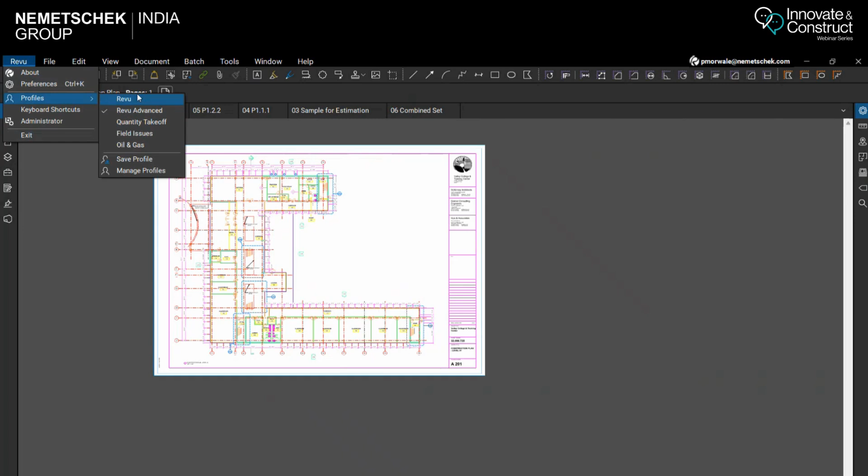But if I change to, say, Revu, you would find some changes happening in the profile. You can suppose change to Revu Advanced, so you will find some changes happening in your user profile. When I was in Field Issues, probably you did not see much of a difference in the user interface, but the tools you are seeing are all talking about issues. When you go to Revu, you can see under the tool chest, it's changed.

All these tool sets under the tool chest changed. So which one is the more appropriate profile? I would suggest that probably you can start with quantity takeoff.

So this is the profile, the user interface, and you can see over here under the tool chest for electrical, mechanical, concrete, interior finishes, fire and safety - all these tool sets are present.

If you want to add your own tool set under this tool chest, just go to manage tool sets and you can add your new tool set. So I will just say webinar tool set, say OK, and it gets saved under your Windows profile. It's a BTX file, a Bluebeam tools extension file. You save it, and then it appears over here.

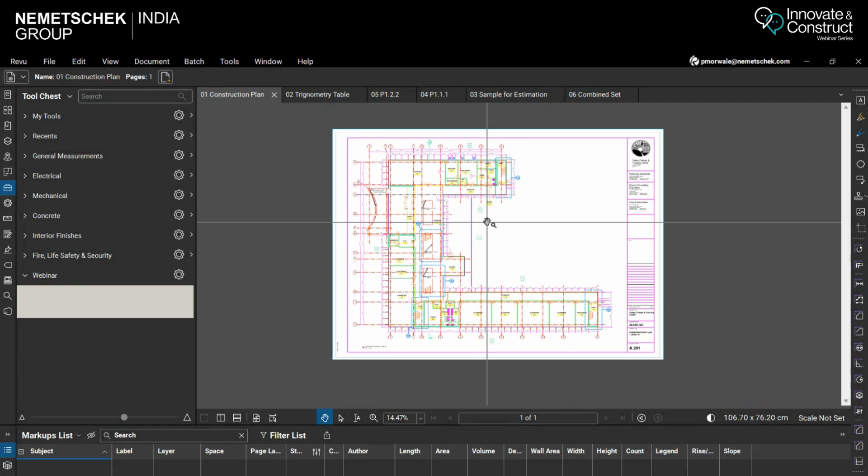Okay, so coming to the next topic: run OCR for the scanned PDF. Let's just assume that this particular drawing that you're currently seeing is a scanned image.

Generally what happens in scanned images, if while scanning you are using a multi-function device, MFD, if it's a very good MFD, there is always an option whether the PDF file should be made as a searchable PDF or if it's just an image.

So if by any chance you have not scanned the image yourself and it is not able to recognize the text - see, right now I can highlight it, but if it is just a scanned image, you will not be able to highlight the text like this or select text like this.

So in such cases, if you happen to get any document, the first thing you should do is run the OCR. OCR is nothing but an optical character recognition, and there is a built-in OCR engine inside Bluebeam itself. Generally, if you don't have the proper application, you would need another OCR engine running first on the PDFs or images. Only then will you be able to identify the characters or the lettering.

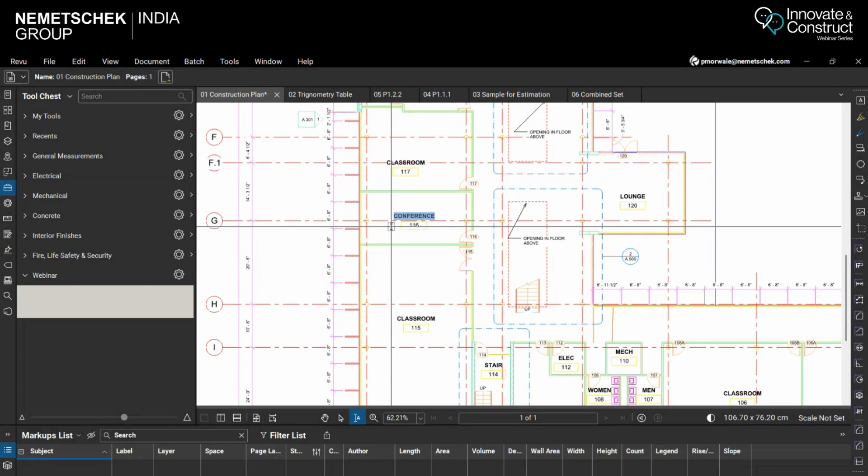But still, there could be some confusion happening around a small L or capital I, or zero and O. So it doesn't necessarily have to be 100% accurate, but it is quite reliable. Only thing, the original document should be quite legible. Now you have the OCR done, and let's now start using the search tool for quantifying the object.

So in this particular example, you can see there are some classrooms, conference rooms, cafeteria and all those things. Imagine this is just one particular sheet, but if you have a number of sheets, maybe floor-wise, and on each floor there are many classrooms, and you would like to know how many classrooms are there in this entire set of drawings.

Based on that, probably every classroom will have one digital board, or maybe every classroom should have at least 40 student benches. So such kind of quantification you will be able to do when you are able to quantify the number of classrooms in the drawing.

Okay, so let's just first start with how to search for something. In the search, you have got textual search, or the image search, the visual search. First we will try to search with the help of text. I want to find out from the current document, or from the current page, or from all the open documents. You can see there are 1, 2, 3, 4, 5, 6 documents open, so I can search a particular text from all of these documents, but in order to save time, I will just say current document.

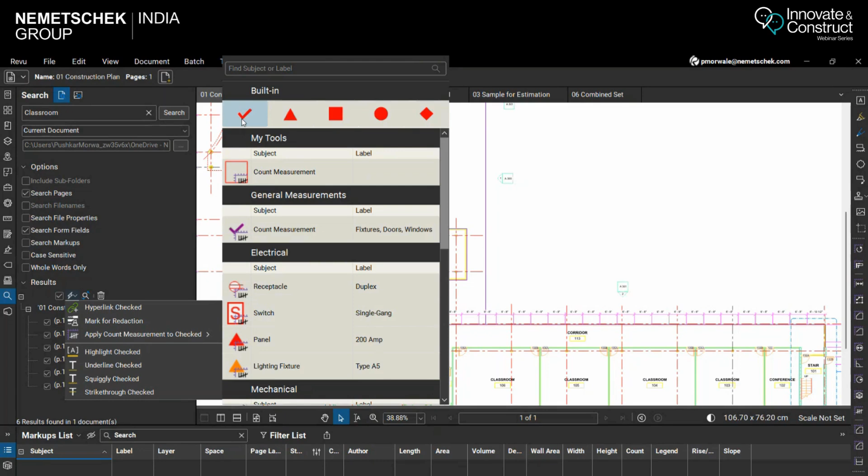So what I can do is select all of them. I can see over here the results seem to be right, and I can select all of them, and then in the check options either I can highlight them, or apply something like a tick mark, or any mark for counting the objects. Let me use this tick mark for it. So you can see wherever there is a classroom, a tick mark has appeared.

So similarly, if I start identifying some other objects, they will also come as count measurement, and whatever number of counts are there, that will be represented. Even if I use the tick mark, it would show the same. So in order to identify what this tick mark was for, it's always a best practice that you give a meaningful subject to this object.

So I would say this was identifying the classrooms. You can see under the subject in the markup list, it has appeared as classroom. Okay, so this way you can search any textual information.

Now, are you able to see that there are sinks, some rectangular shape sinks there? This cannot be identified with the textual search. So for such a thing, we will make use of this visual search, and I'll draw the rectangle to define what I would like to search. So it shows over here, and then I will click onto this search.

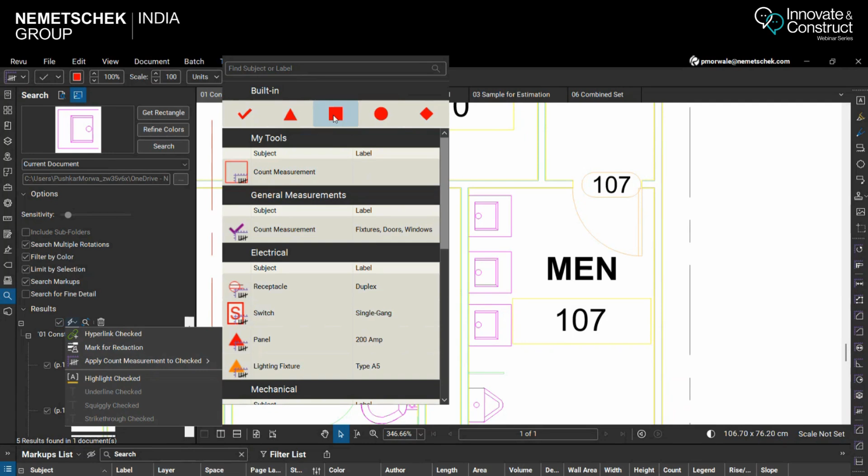So it shows me there are 5 results, and you can just cross check whether they are right. So yes, it is correct. And in this case, again, maybe I can apply the same tick mark, or maybe I can take some different symbol. Okay, so let me take this as the symbol.

And maybe what I can do is, let me just change the scale for it. Maybe I'll make this as 25.

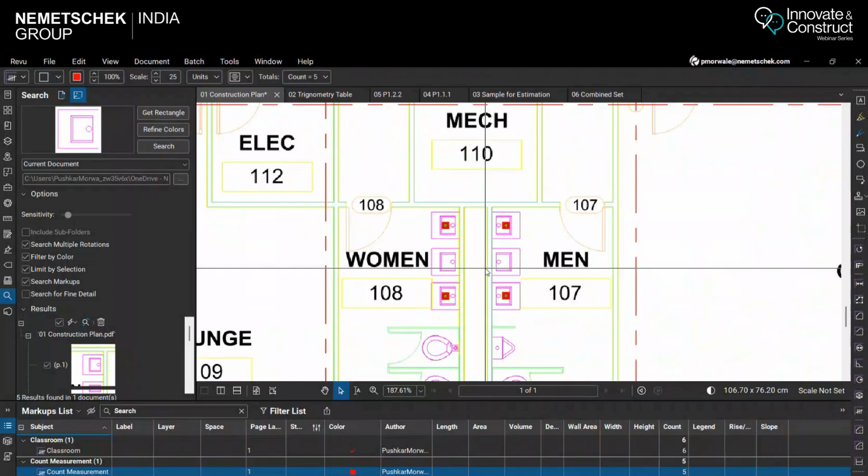Okay, for some reason it has not selected this. Maybe you can reduce the sensitivity or filter by color, and all those things are some parameters. Depending upon the parameters, it is actually selecting. Or you can put this as an additional quantity that will also get quantified.

So currently, let me just put this as sink. Okay, and you can of course change the other property also, so let me change the color for it. Okay, so this way you can go on quantifying the objects also.

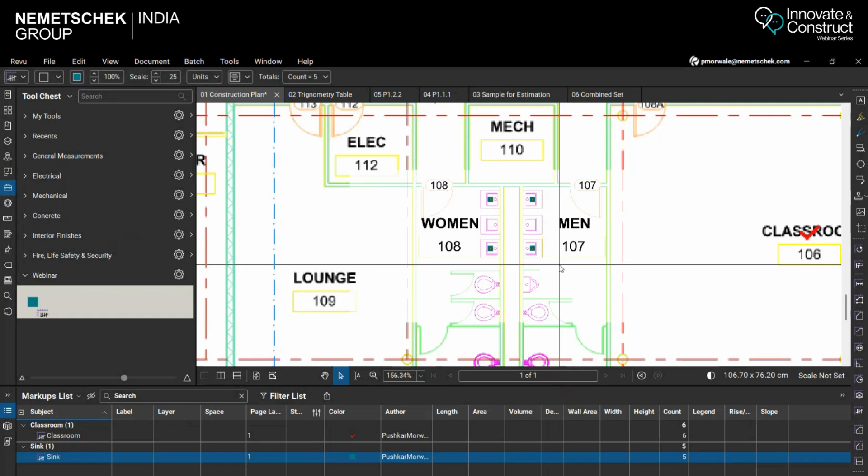Now you remember we had created this webinar tool set, which is empty. What I can do is select this particular symbol and I will say add to tool chest, so it gets added over here. And then maybe if something is missed out or left out, or if I want to add more sinks in probably some other room, all I have to do is select it and mark it wherever it has been missed.

So now it is showing you that 5 and 2 - so altogether 7 sinks are there in this document.

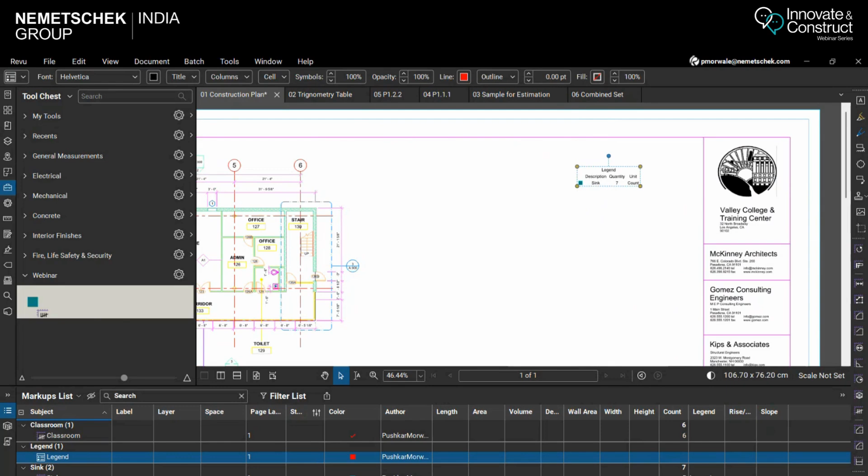Then what I can do is, if I want to create a legend table for these things, I just have to select, right click, and say legend, create new legend, and I can place it in the drawing itself. So you can see it has created a legend for all the sinks - there are total 7 number of sinks, and it has put that in the table.

You can also change the title for this, as well as maybe give some line width, and instead of outline, you can make it like a grid. Okay, so this way you can go on creating the legends also for the measurements or counts that you have done. Okay, so similarly, maybe if you want to get the quantity of the doors, or windows,

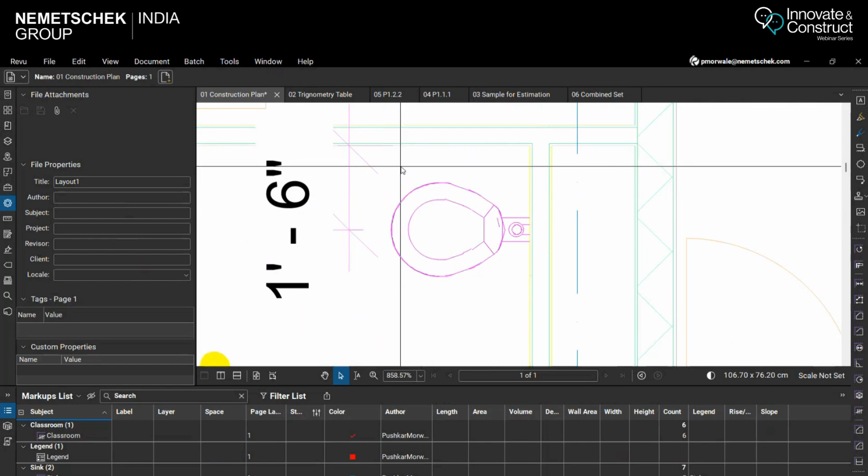or the other plumbing fixtures like WC and all, this way you will be able to get the quantities. So this way you can use the search tool for searching your textual information or the visual information. And also whatever count mark that you have got, you could add it in your tool chest.

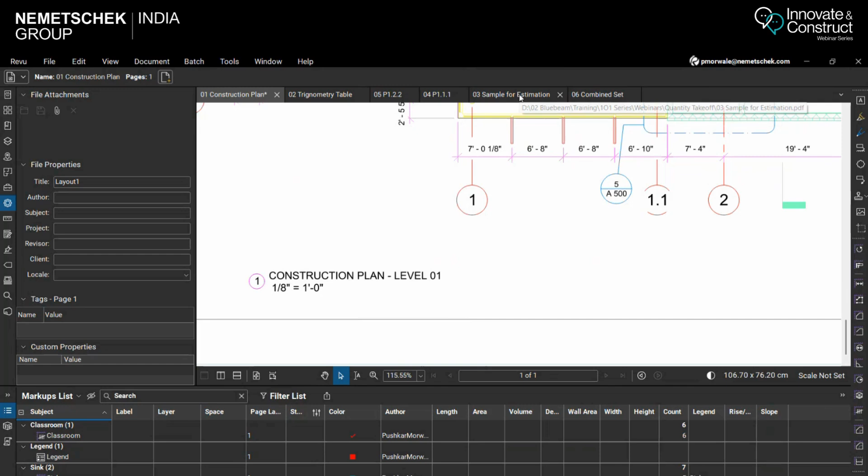So now we will jump to the other topic, that is how can we do the other measurements like length, area, perimeter, or volume kind of thing. So in each and every drawing, you would always see there is some scale mentioned. In some cases, I am just showing you another example where there are multiple scales also, like there is a main scale over here, and then there are sectional views having a different scale. Okay, so we have to set the scale of this particular document first.

Can you see at the bottom, it is mentioned as scale not set. So the first thing that you will have to do in case of the measurements is set the scale for this. So in the preset, you would generally find all the standard preset scales used for engineering, I mean the metric system or the architectural system.

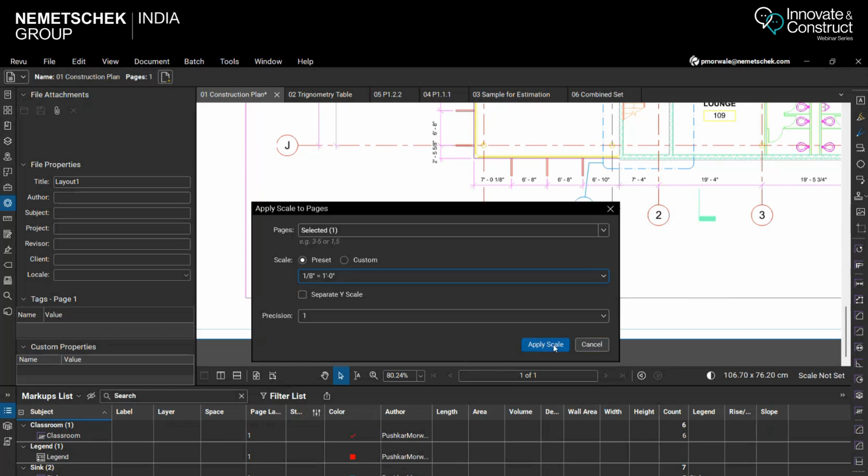So it's in feet and inches or like in the metric system. So in this case, the main scale of the drawing is 1 by 8 inches equals 1 feet, so that I would apply over here. There is also a facility to have a separate Y scale. Okay, so now this has been set, you can see over here it is same as this.

So quickly what we will do is we will just go to the measurements and cross check whether the scale is correct or not. So one good thing about Bluebeam is, if the PDF is being extracted from any vector native application or authoring tool or CAD application, then it gives you the snap also, so you can snap to exact intersection points or the end points.

I will just change this, the length part, into feet and inches. So there seems to be some discrepancy in this case, because this was mentioned as 7 feet and 1 by 8 inches. So the scale which has been mentioned on this drawing is probably not right.

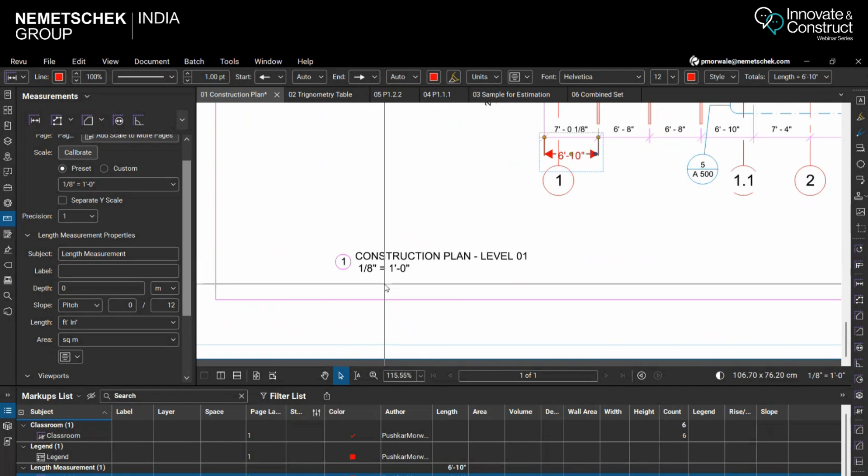So the next thing we can do is, instead of using this standard scale, there is an option to have the calibration done. So what we can do is we will say calibrate, okay, and we will select the same points. And it is telling me that in the drawing, it is so and so inches, which is equal to 7 feet, 1 by 8 inches.

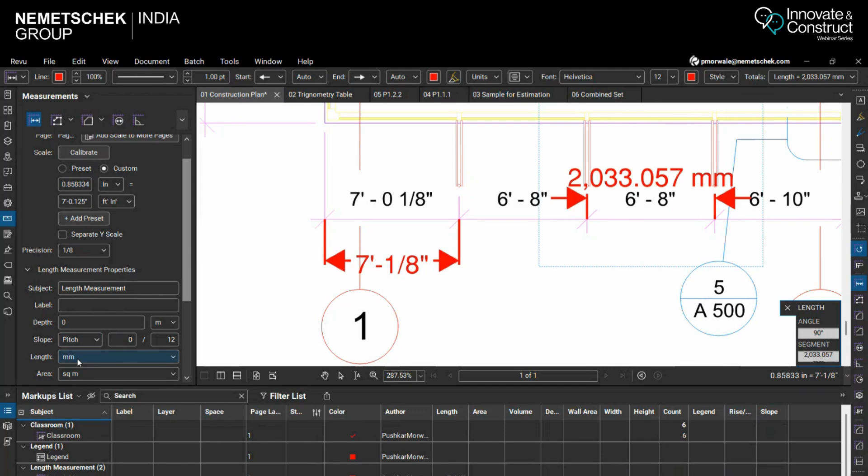And maybe the precision, I can do it like this. Okay, now let us see if this particular scale is correct or not. So let me just try some other dimension. So now you can see it is correct. So this way, I will set this.

And this I will set as default. So instead of getting the millimeters in again and again, I would now get feet and inches. Okay, so this is now calibrated. So once this is calibrated, for me, it is very easy to find out some lengths or area.

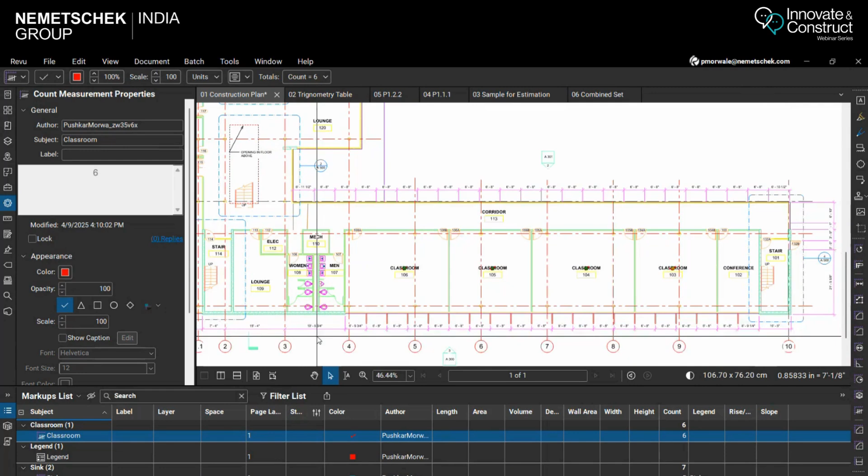So let's just start with maybe the length. So which all measurement tools do I have? I've got the length, I've got the area, I've got the volume. So now in this case, okay, so there seems to be some overhead canopies there.

And since the dimensions are marked from grid to grid, but this canopy is starting from this point onwards till this point over here, it is not matching exactly with the grid. So it is difficult to find such length. So what I can do is, now this drawing is already calibrated.

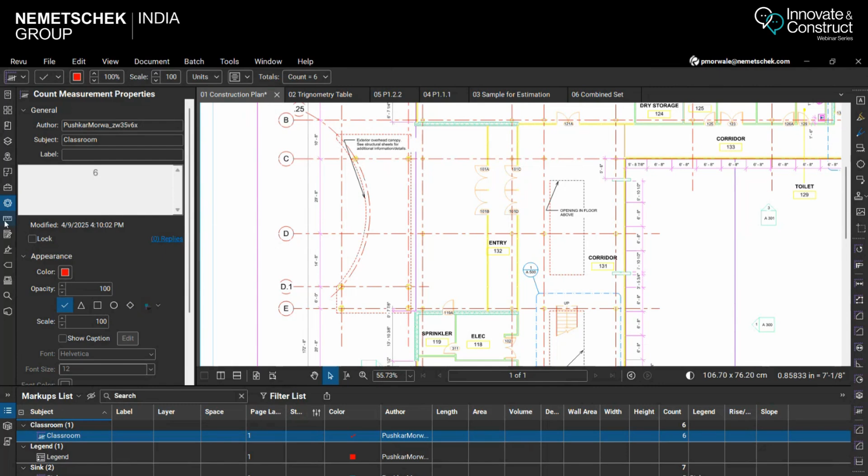And if I want to know what is the length and the width of this canopy, then I can go to measure length and use this endpoint. I can select this endpoint and this endpoint. So it tells me it is 49 feet 4 inches. And then from this endpoint to this endpoint. This way I can get whichever length I want.

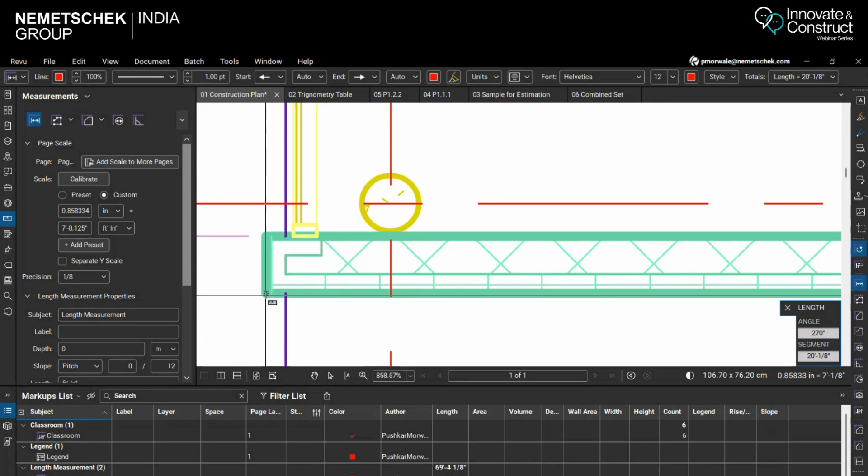Now in this case, it was snapping to the exact endpoints or intersection point. Many times what happens is, if you are extracting it from some application, there is generally a line weight. So you can disable that line weight over here. Like right now, I have enabled the line weight, so you can see the thicker lines. In such cases, getting the exact intersection point could be challenging. So you can always disable the line weights and then you get those sharp intersection points.

So that visual setting you need to do before you start measuring for the length, area, or perimeter, so that you can snap to the exact points.

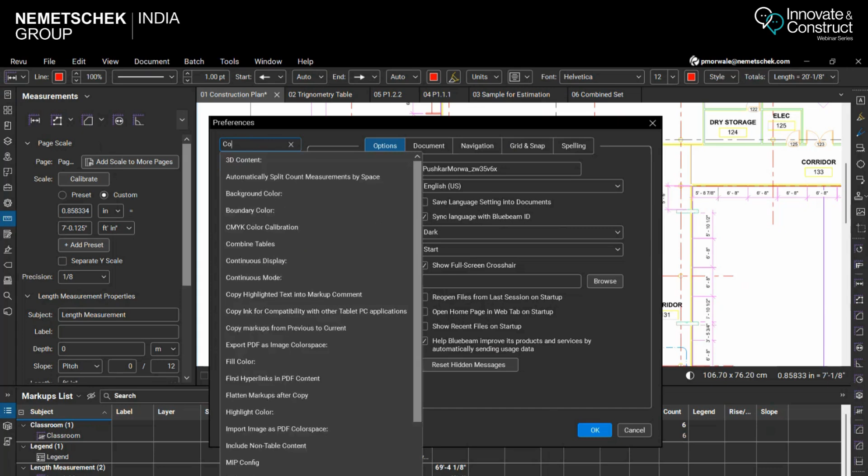Another thing that you would require is, in the preferences, you can make the mouse crosshair show full crosshair. So you can see over here, show full screen crosshair is there. That's why I'm able to see a crosshair like you find it in some CAD applications. Otherwise, it's a very small mouse crosshair.

I can just quickly show you how it looks if you haven't enabled it. So if I remove this, then it is very difficult for you to pinpoint. So for the CAD users, this is very helpful, that you have the full crosshair and the line weights are disabled. So this was about the length.

Now let us try to find out, and every measurement that you do gets recorded inside this markup list. Now let's try to find out the area. Okay, so let's again take the area of this particular canopy itself.

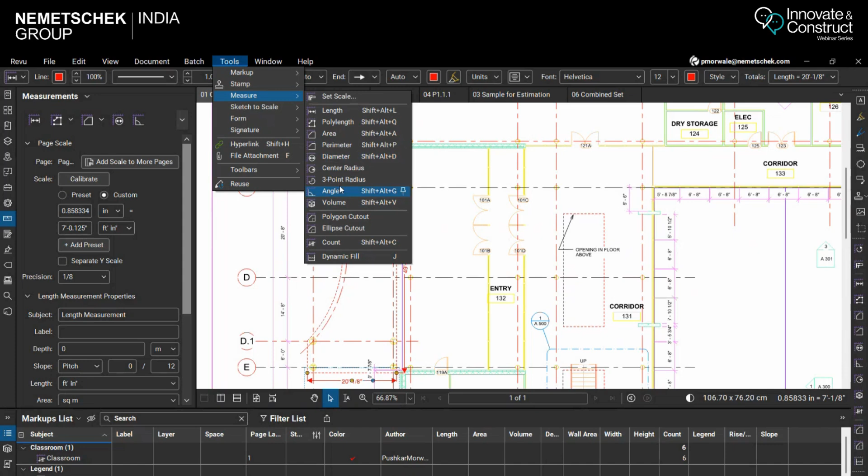Okay, so what you can do is you can again go to measure and go to area, and then you can just go on clicking onto those endpoints. Okay, so this canopy is actually a curved object, but with the help of clicking for the point, it gives you the rectilinear kind of shape.

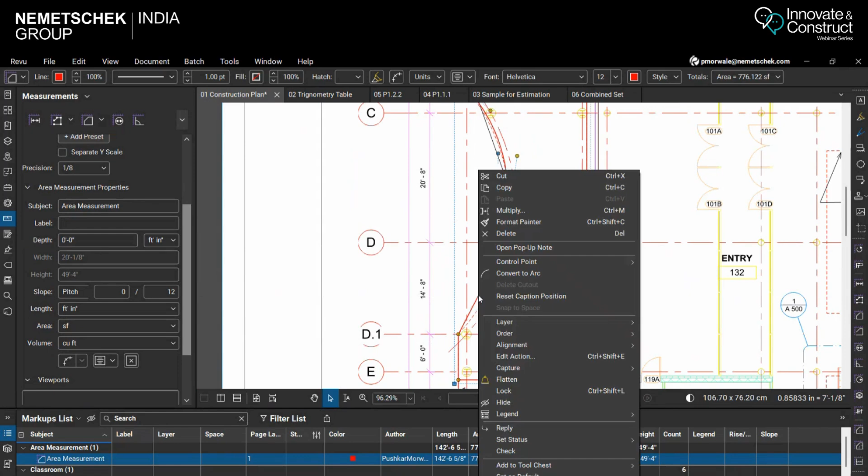So just right click on this and you can convert it to an arc. Okay, and then you would get these tangent handles to match the curvature that you have. So are you able to see it's like going on changing the area as I change the curvature? This way you will be able to find the area even for a non-linear kind of object.

So your skill lies in just making this curve very accurate. And this is the square feet area of this particular object. And you can see over here, it gets recorded as an area into this. So for this, instead of the subject area measurement, I can mention it as canopy. So then it gets identified.

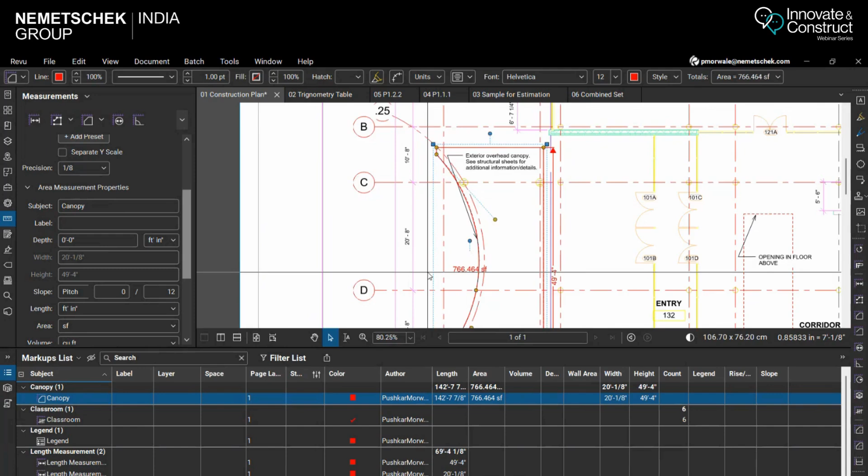Okay, so now if I want to have the length measurements or the area into a legend table, I can get it by selecting those objects, right clicking, and going to legend. I can create a new legend also for it. So it would tell me what are the length measurements accumulated together, and what is the area for various objects. Again, I can make it into a table.

I can give it some name, and I can make it into a table.

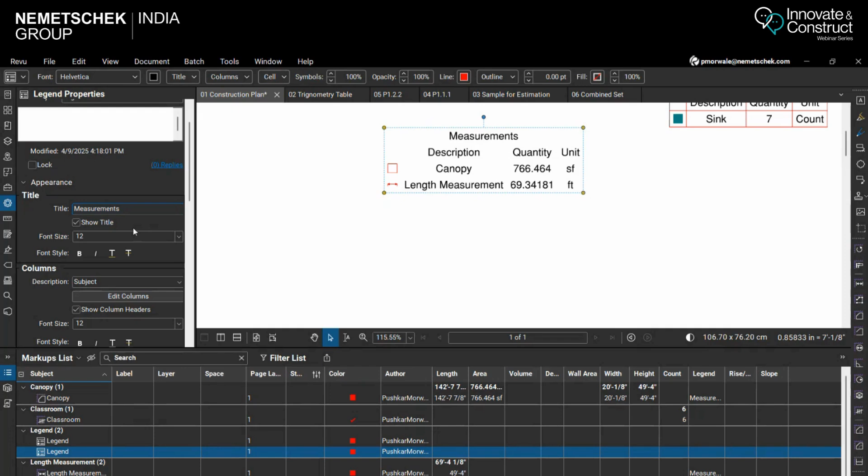Okay, now I want to show you something interesting. So that was about the lengths and the area. Now let's try to do the polylength.

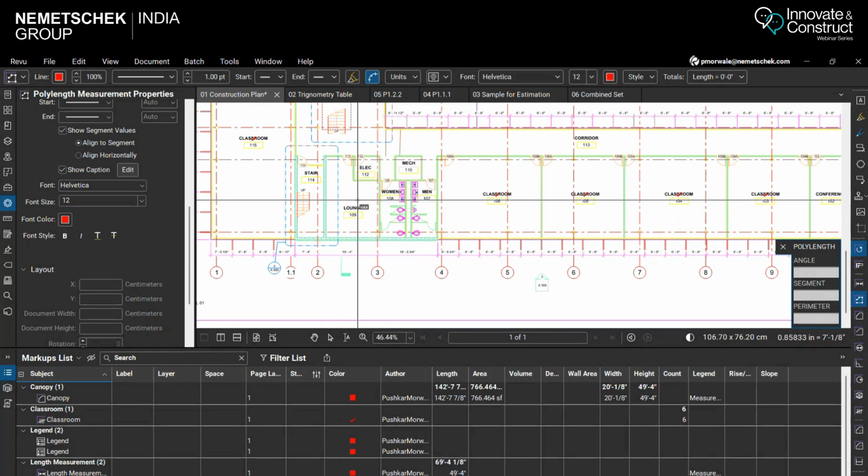This polylength is useful when, say, you're from the MEP department and want to measure the cable length or conduits running from this electrical room to the conference room. In such cases, you would take a source point and go along this path to the conference room, wherever you'd like to have the electrical points or sockets.

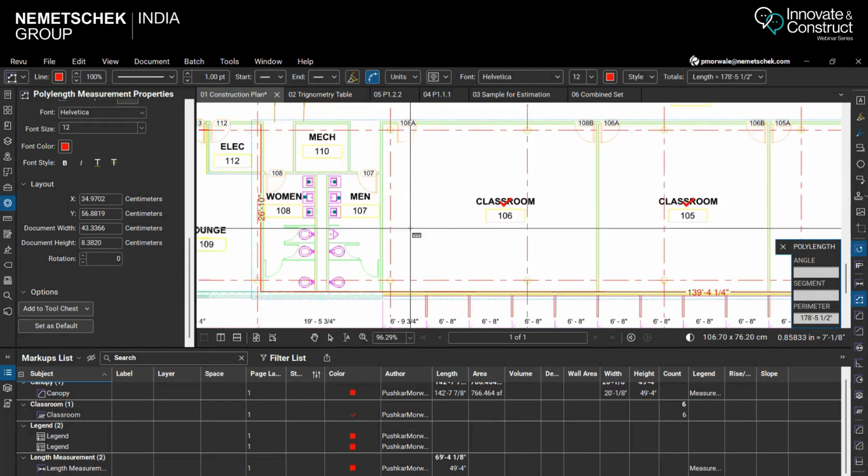It tells me this 178 feet is the accumulated total of various segments: 26 feet 10 inches here, 139 feet 4 and a quarter inches here, plus 12 feet 3 and a quarter inches. All together it accumulates to 178.

But there could be a rise and drop happening at this point, as well as a drop here again. Let's assume at both places it's roughly about 10 feet rise and drop—10 feet in this room, and 10 feet in this room also. So roughly about 20 feet of rise and drop total.

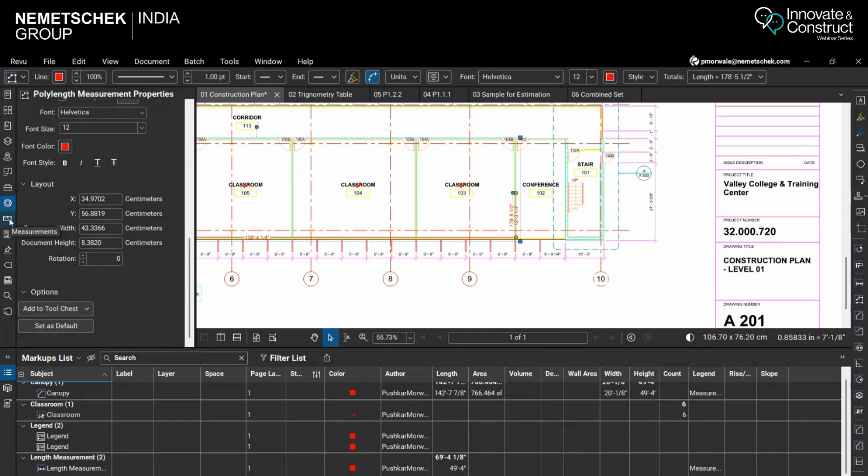So what I can do here is, can you see when you select this polylength measurement, there is a rise and drop? I can accumulate it together as 20 feet. So instead of 178 feet, it now becomes 198 feet, telling you the total rise and drop is 20 feet. This is one good thing.

Now let's assume sometimes the length will be having a slope. The slope can be applied in case of length measurement and area measurement.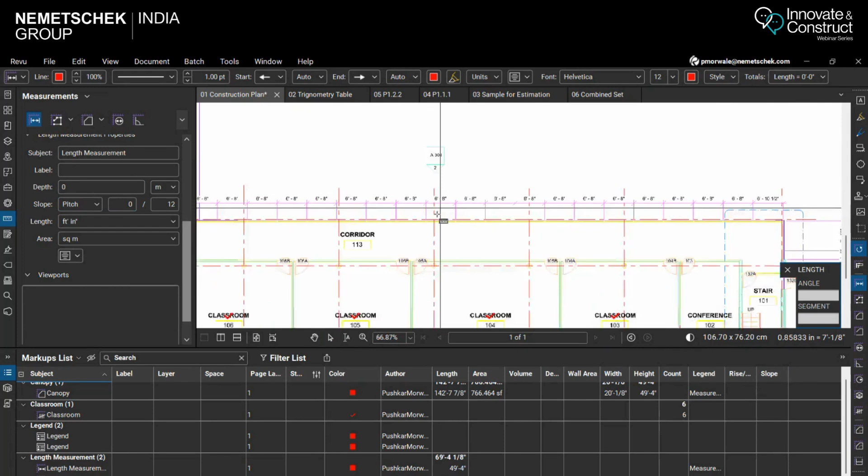For the length measurement, suppose you take a measurement from this point to this point, but there is a slope in this—say, for example, 30 degrees. If you make this as 0, the horizontal length is 32 feet 11 inches. But when you put a sloping degree to this, it increases and also mentions what the slope is.

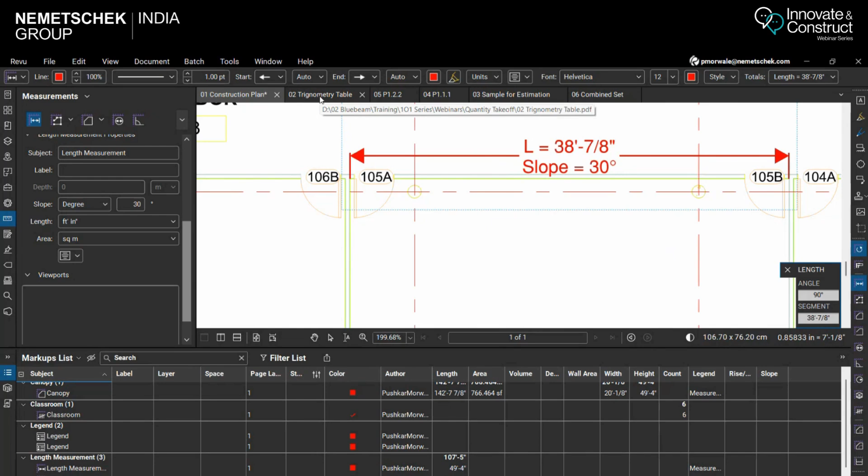Now, whether we have got this correct or not—this refers to the basics of our mathematics or engineering, trigonometry. Depending on what kind of slope there is, you get sine, cos, and tan values. So if it's like 500 length and the slope is 30 degrees, it should show 577.

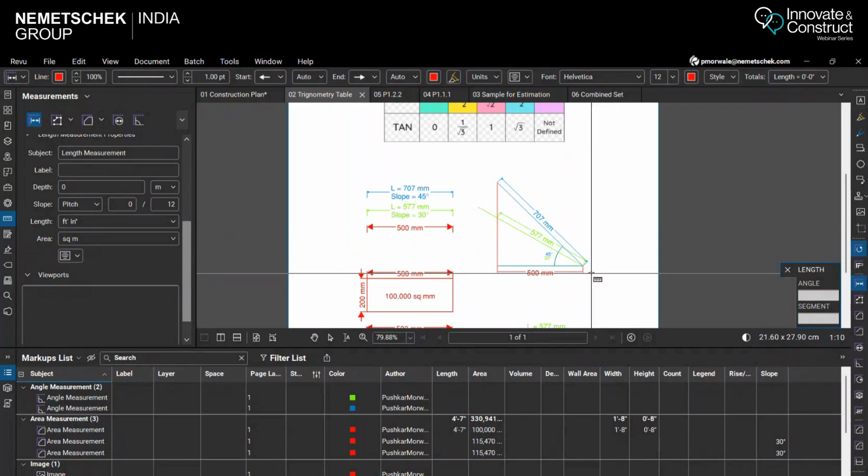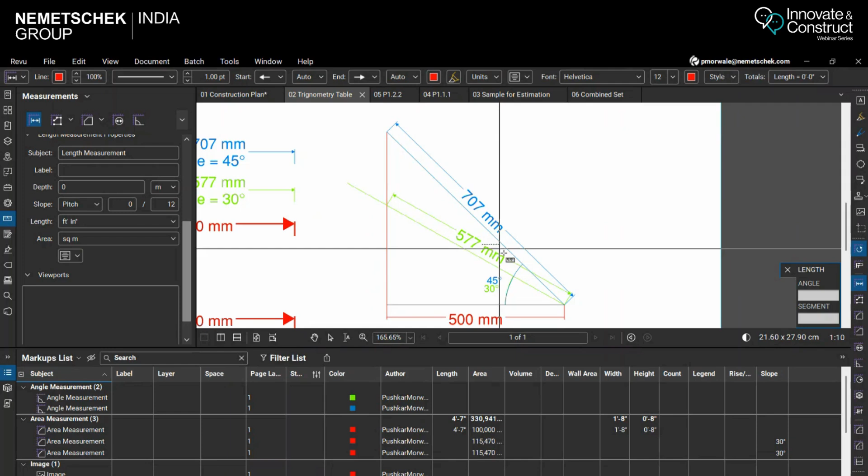There's this particular diagram—if you remember your basics, the distance is 500 and this angle is 30. Then based on cos 30, you should get this as 577. If the slope is 45 degrees, this would become 707.

So in order to check this, I've put this particular formula here so you can cross-check. These dimensions I got through the measurements. The degree matches here, and the lengths are also matching.

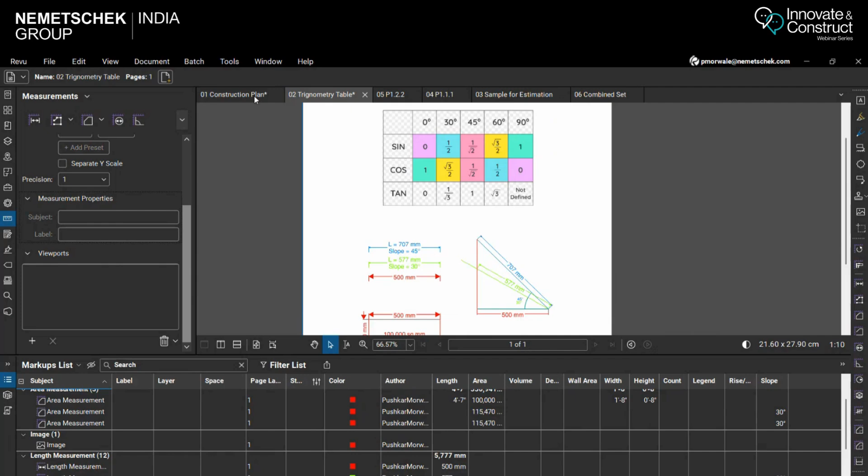So whenever you come across any slope like this, you can use this degree slope without any hesitation, and the results will be accurate.

The same thing also happens for area. If there is no slope, this is going to be your area—the example here is 500 mm by 200 mm. If there is a slope, maybe in this direction, you can consider the length as 577 instead of 500, and then it gives the correct area.

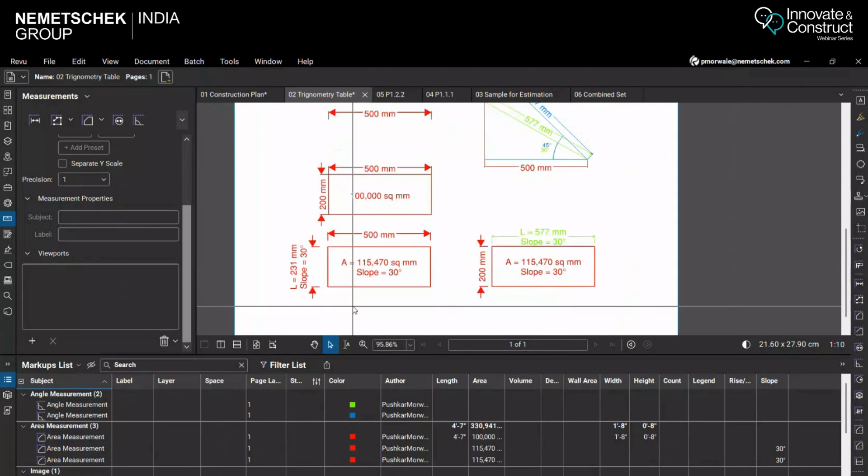And suppose the slope is in this direction also, 30 degrees—instead of 200, now it's 231, and the area can be calculated like this. This exercise I've done just to ensure the results in Bluebeam I'm getting are based on our basic mathematics, and they are correct.

This was very interesting for me also—I could revise my basic mathematics and trigonometry, which I learned during my school time, and it helps.

I would like to show you about the multiple scales. In this particular case, there could be multiple scales in the same drawing—a base scale here, and multiple scales for the sectional details. So how do we set the scale for such a thing?

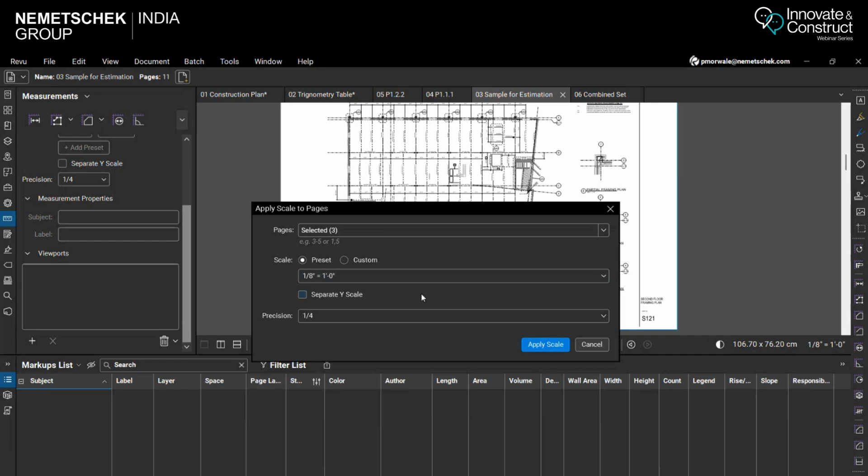First, I would put the preset scale as per the scale mentioned, or I could also do calibration for the drawing. I've set this 1 by 8 inches equals to 1 feet—let's just cross-check whether this is correct or not.

So this is right, that means this scale is perfect for this particular plot. Now let's take the measurement over here. This is 5 feet 4 inches, which is also correct. And almost the same distance you can see over here, slightly less, but not very much less.

But now it is showing totally different. Instead of 1 feet half inches, it is showing me 3 feet 1.5 inches. That is because the scale for this particular sectional view is different.

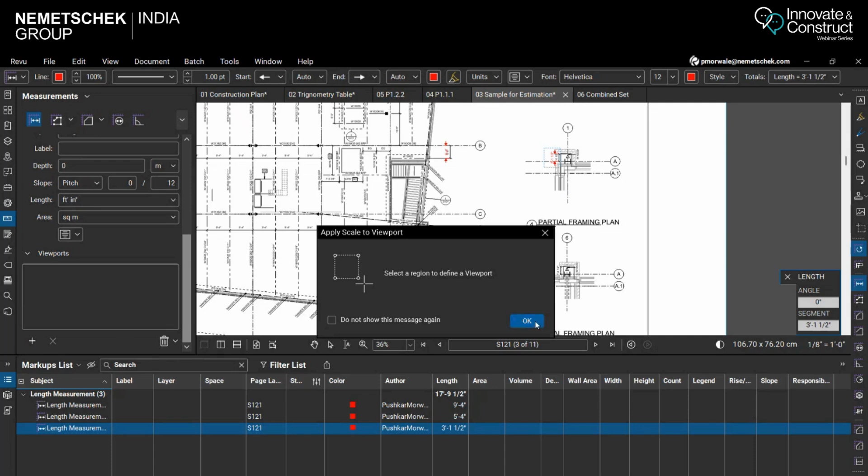So how to create multiple scales in the same drawing? There is something called viewports. You just add the viewport and select the area wherein there is a different scale. I selected all these three because the scale for all of them is 3 by 8 inches equals to 1 foot. If they would have been different, I would have added different viewports and applied different scales.

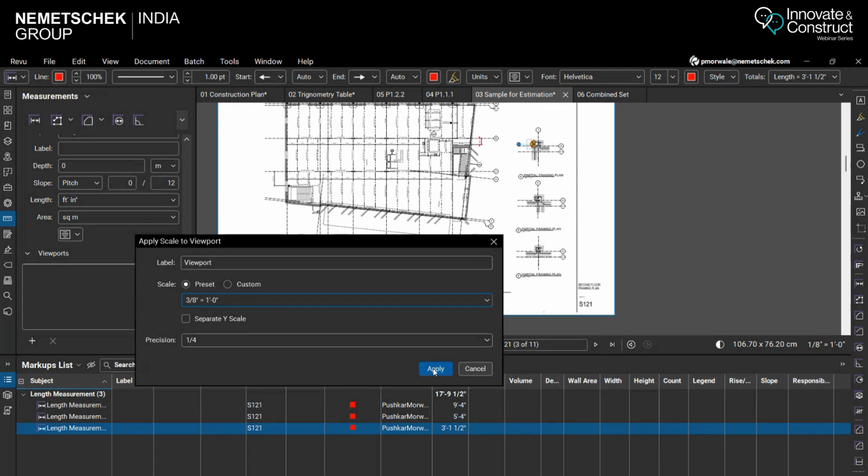Okay, so now this is the viewport, and as soon as I put it into a viewport with the intended scale, you can see now it is representing correctly. So this way you can go on adding multiple viewports.

So for this viewport, I can also mention some meaningful name so that I would remember. This is for 3 by 8 inches. Similarly, if I want, I can add one more viewport wherein it could be half inch equals to 1 foot.

So, say for example, like this. And for this, I would mention 1 by 2 inches. Okay, so suppose if I get this.

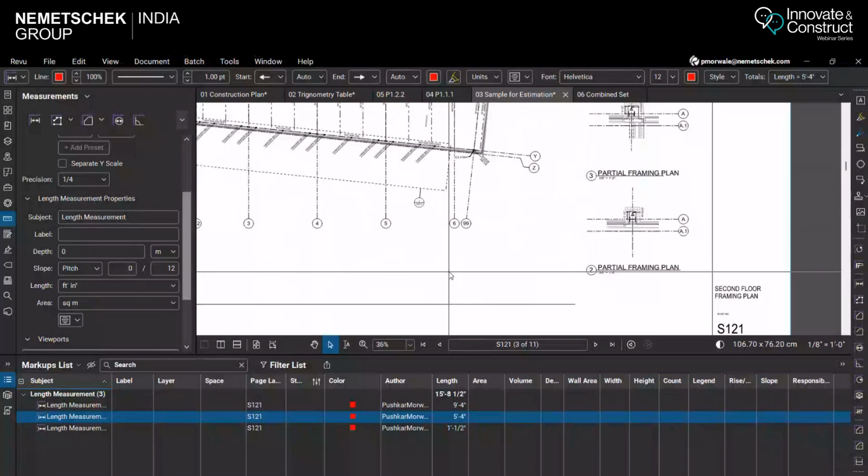Can you see, the same measurement I have copy pasted, but now it is showing me something different - 1 feet 4 inches, because over here the viewport is different, the scale is different. So this way you can go on creating multiple viewports also.

Now let us go to another interesting topic, that is about having the dynamic link with Excel. So there is this particular drawing, and you can see that there are some WCs or sinks. In the sinks also there is a round sink, and a square type of sink is also there, and they all are

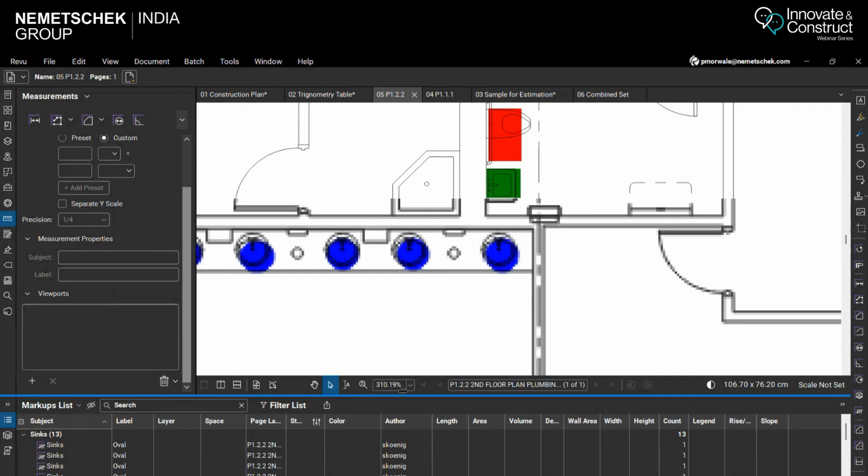recorded over here. So what I can do is I can quickly select all of them, right click, and add a legend. So it tells me that there are this particular sink type is only one count, these are 12 counts, and the toilets are 18 counts.

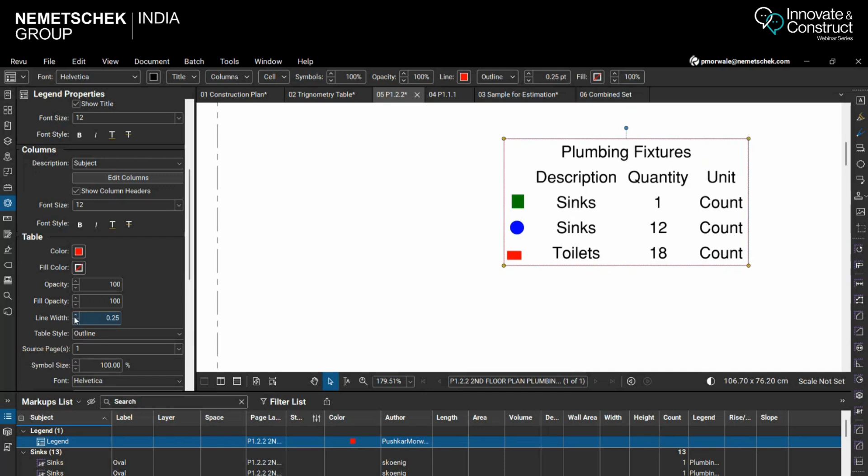For this, I will mention the subject as plumbing fixtures. And again, let me make this as a proper table, and then let me save this.

And then there is another document, wherein again there are these kind of sinks and toilets. So again I will select them, and I will create a legend table for it. And for this also maybe I'm putting the same plumbing fixtures.

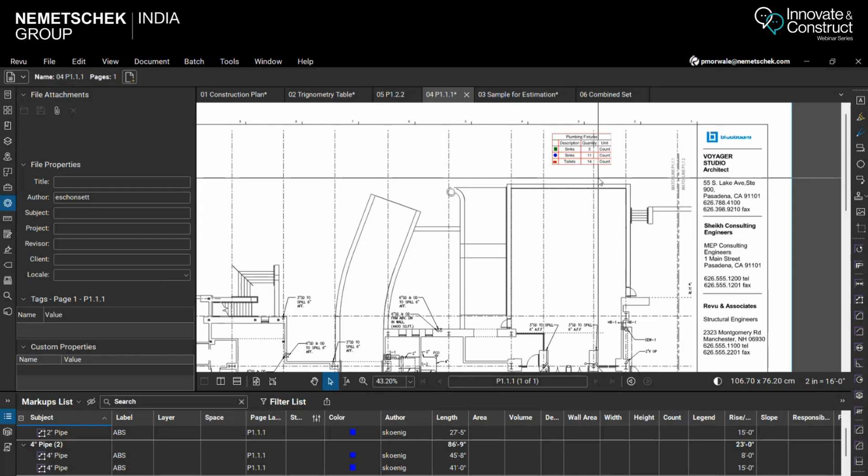Okay, but in this particular document, you can see there are some pipes also, 4-inch, and I can see there is a 2-inch pipe line also. So for this, maybe let me create another legend table and put it over here. Okay, and these are pipes.

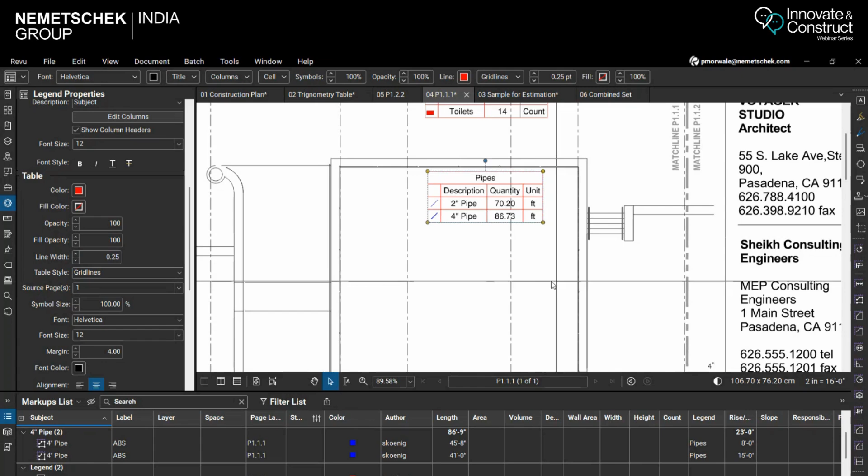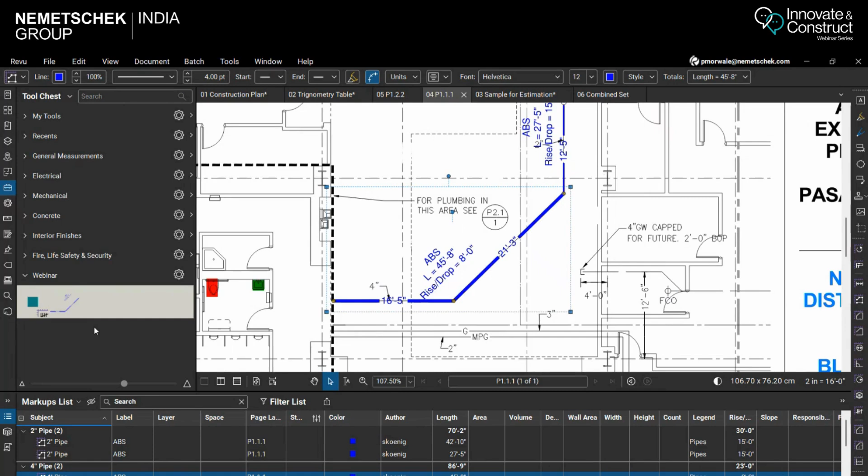So this way you can put quantities in the drawing itself. And suppose if you want to utilize this particular 4-inch line or 2-inch line, all you have to do is select the 4-inch line and then add to tool chest. So you can see over here it has become a 4-inch line. Now I can reuse this, but currently it is in the drawing mode.

So drawing mode means it is exactly copying the same thing over here. Instead of this, I can just double click onto that particular tool, and then I can turn it into a properties mode, and then I can start marking the pipe. So you can see over here right now it has become 118.9 feet.

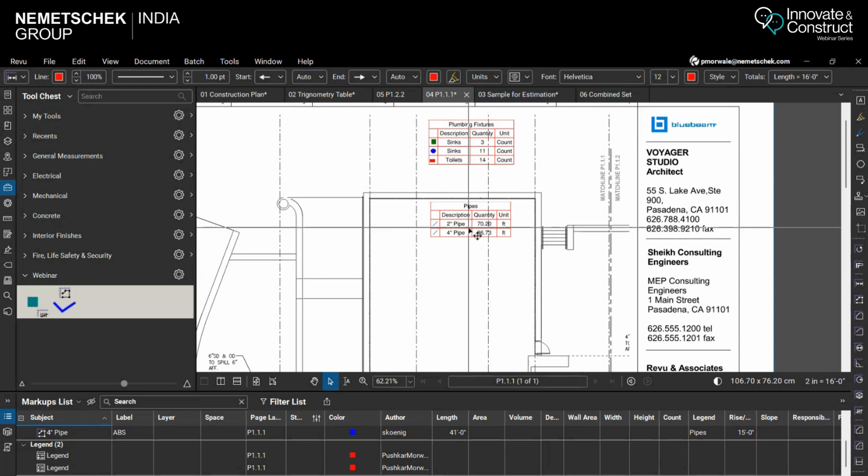If I delete this, you can see in the table also it is changing, right? So this happens, I mean, it is linked, always linked to the legend table. If you go on adding more measurements, it will go on updating in the legend table.

Now let us see how this will be there, I mean, automatically it can update even in the Excel also.

So I'm just opening this quantity link expanded Excel. Let's assume that you have a predefined template. You want to know the cost for the measurement of 2-inch pipes. There is a unit mentioned here, the unit cost is mentioned, and the total cost is over here.

So what you have to do is, in the quantity, you want to link to this particular PDF file. Just right click and you will see this quantity link option appearing when you right click onto any of these cells, and you have to click onto create. Then you will have to get the exact same file.

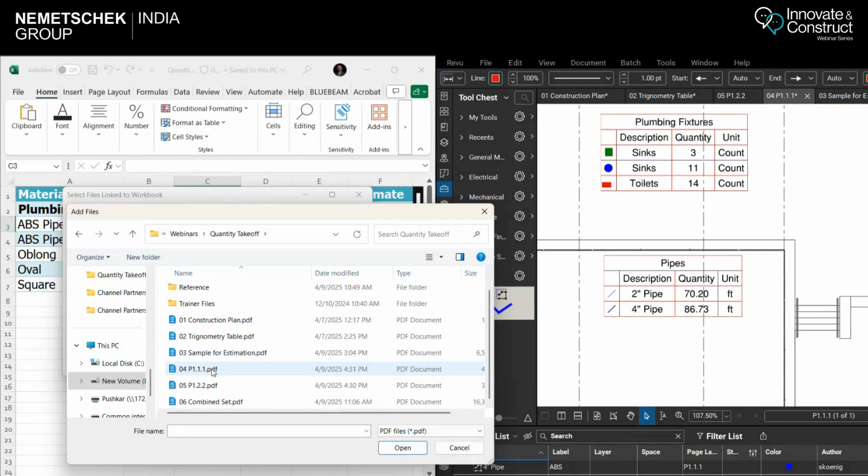So I will just go to the same file. There are these two files with which I want to link it. Then what I want, the first quantity is the 2-inch pipe, so measurement of length of the subject 2-inch pipe. Okay, and say okay.

So you can see it is reflecting exactly the same 70 feet 2 inches. And for the 4-inch, again the same thing. You just have to right click quantity link. The source files are already selected. All I have to do is just get the length of subject 4-inch pipe and say okay. So you see automatically the table gets updated, it is same, 86.73.

And remember, let's just add some measurement over here. The moment it gets changed or added over here, it gets changed in the BOM table also in the drawing, as well as it gets updated automatically over here.

The same way, now you want to find out the toilets. So for that, you have to create a quantity link of the count of subject toilets.

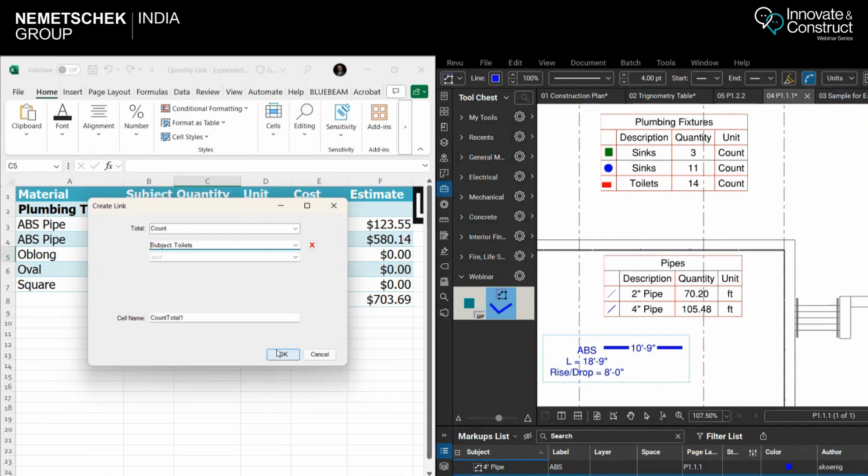Now in the sinks, you can see the subject is only sink, but the material is oval or square. So how to get that? Quantity link, create, count of subject sinks, and the label is oval first. I'll select oval over here, say okay, and then square over here. Create, count of subject sinks, and within sinks the label is square. Okay, so there is 4 count.

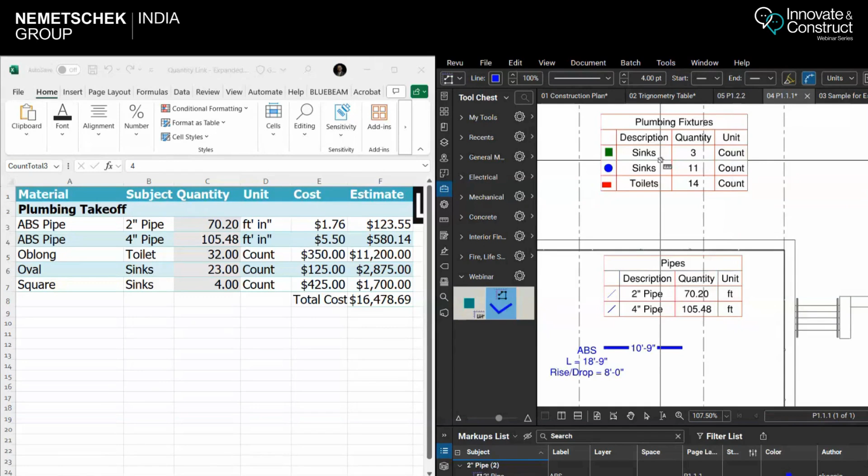You can see over here in this particular document there are 3 sinks, and in this there should be 1 sink, that means 4 square sinks are there. Over here oval sinks are 12 numbers, and over here sinks are 11, so altogether 23. Since we created a link with both these files, it is accumulating everything and giving you this dynamic link.

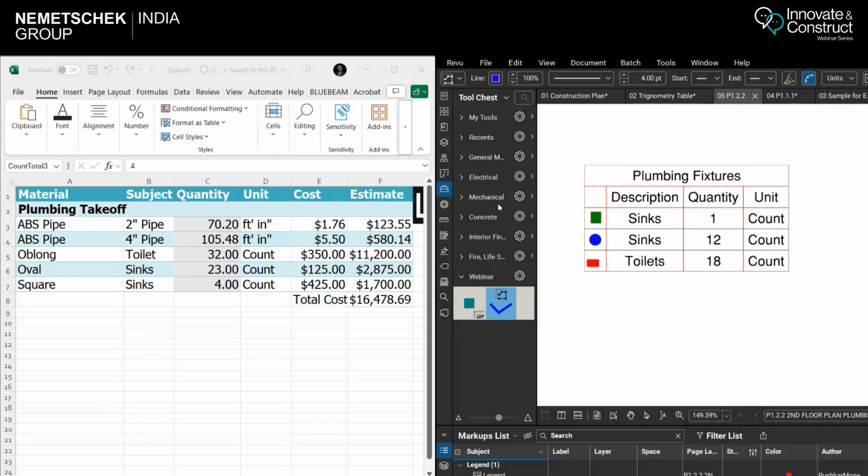This way you can get your Excel template or Excel BOM table also updated. So once all this quantification is done, you get everything in your markup list. Whatever markups you have done, measurements you have done, it is very easy for you to simply extract it in the form of an Excel.

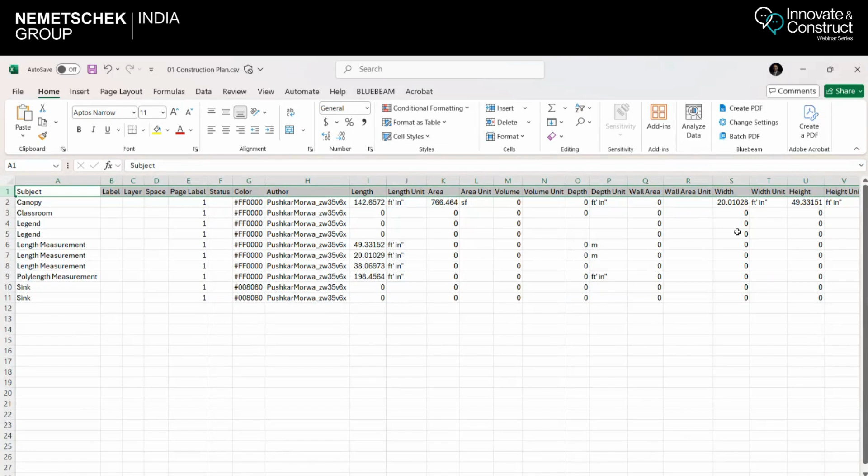Wherever you want to save this, export it, just select all these appropriate options, and then it would create something like this. Which also can be used further, since it is in Excel format, you can put filters, or if you don't want any columns you can delete or hide them from here. You can do calculations also over here. So either you can use this kind of table or you can extract the Excel from here.

How to add or remove the columns? In the markup list, you can see wherever these tick marks are there, those are the columns that you are seeing over here. If you don't want something, you can simply tick this off and then it gets removed from this, and then you can extract your summary.

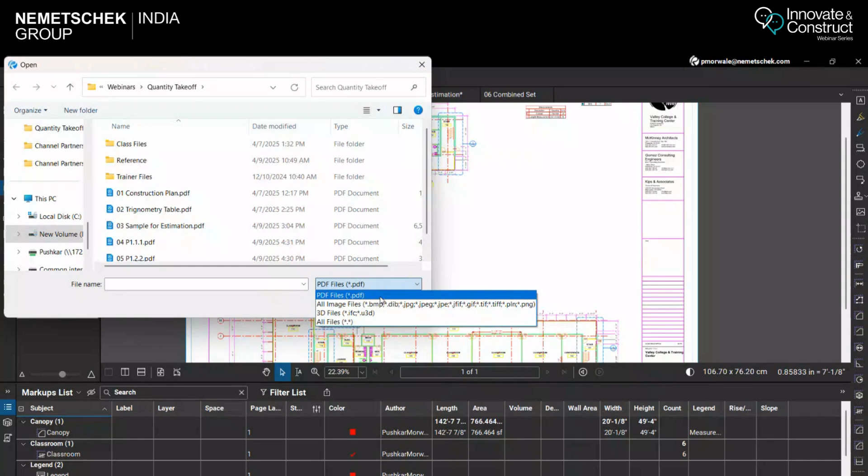Yeah, I think we have some questions. So I'm picking up the questions from the Q&A box first. Bharat Vasu has put up a question: can we use PDF drawings in Bluebeam? So basically these are all PDF drawings only. In Bluebeam, whenever you try to open any document, it is asking for PDFs only, and on the PDFs only we are going to do the estimation.

Just assume that you are not going to have the native files, like maybe some CAD files or 3D model files. It is just on the basis of PDF how you can do the estimation. So of course, Bluebeam is a PDF authoring tool only, and it will be able to handle PDF files. Hope that answers the question, Bharat. And one more question from Bharat: can we take BBS in Bluebeam? Bharat, if you can mention what do you mean by BBS.

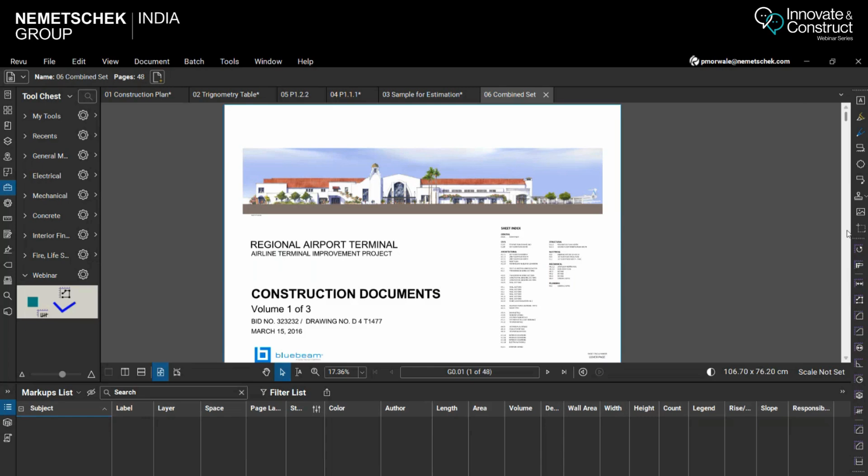So you want to convert some tabular kind of information or format into an Excel, right? I guess my understanding is correct. Let me see if there is some tabular form kind of sample file with me.

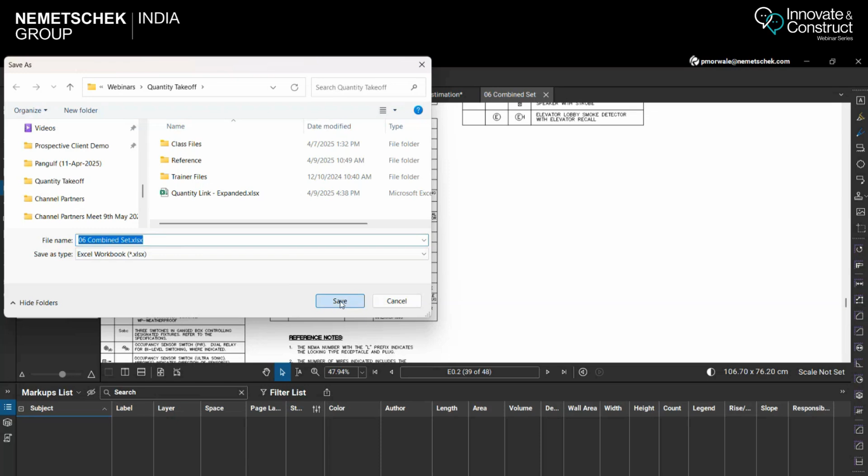Yes, generally it is possible because there is an export as Excel option. So maybe with this kind of sample, okay, and you want to have this into the Excel, all you have to do is export Excel workbook and maybe just the page region, okay, and you can save it as some Excel. So it is going to run the OCR first onto this. Probably it was like a scanned image, it would take some time, but then it should show me this exactly in my Excel.

So if you have got technical data in the form of a data sheet or a table, then you can convert it into an Excel. I hope this answers, Mr. Atul.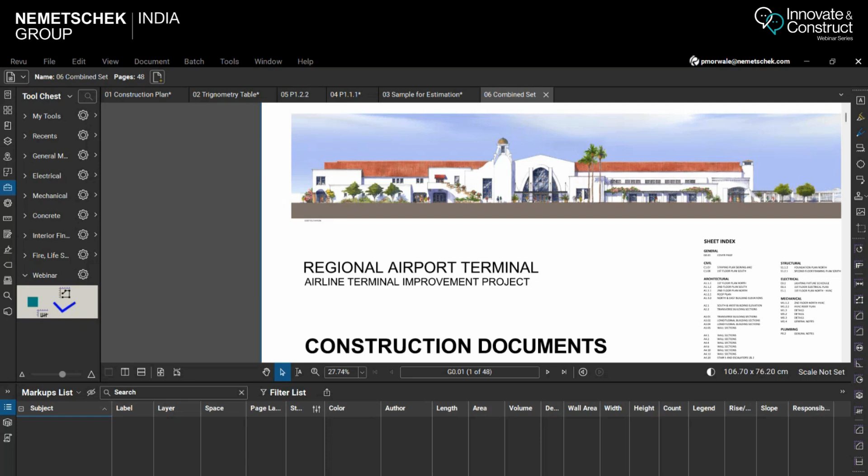Okay, wonderful, I'll just quickly demonstrate that part, which is called cutouts. Let me take some example like this. There is this particular slab, and maybe I can find the volume for this, or the area. Let's just take only the area at the moment.

So you can go to measure, and there is a dynamic fill option, only for the plan complete, which is nothing but like a paint bucket tool. You just have to click and paint it like how you would paint with a paint brush, and wherever it finds the boundary it will stop there, and then I can mention whether I want area or maybe even the volume.

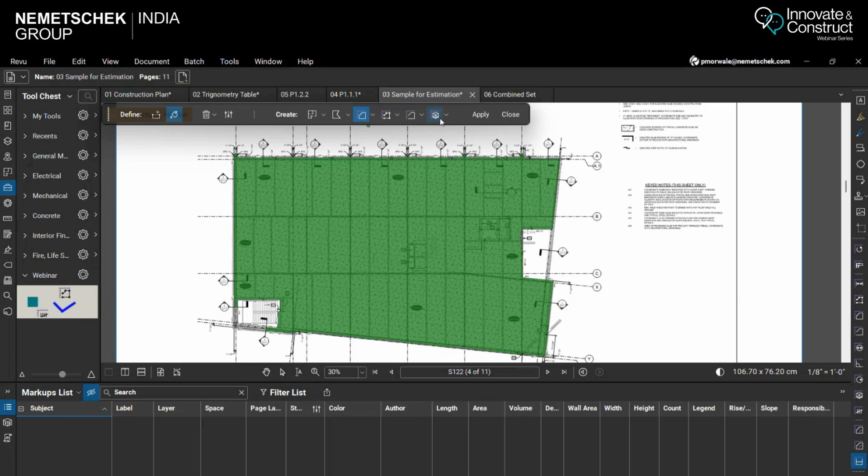Sorry, can I call you, I'm a little busy. I'll give you a call. Yeah, I'll give you a call.

Okay, and over here you can see both the area and volumes are there. So I'll just slightly shift the text for the volume.

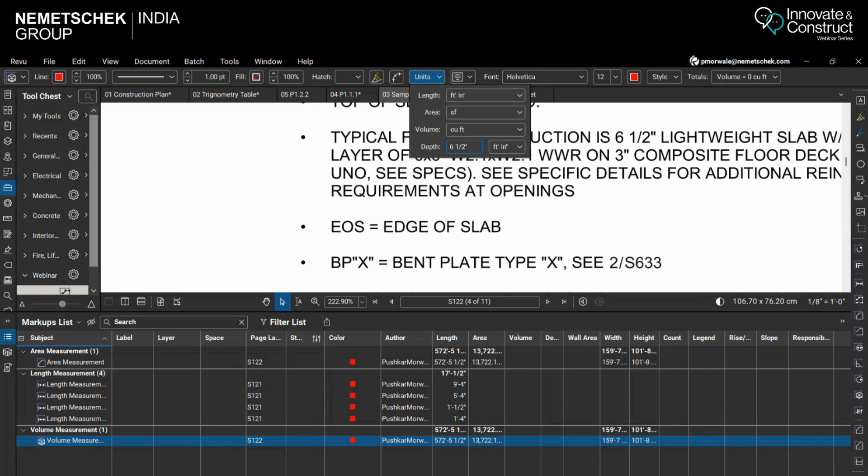Now you want to add the cutout over here. The area or the volume that was selected did not consider this rectangular cutout, or these cutouts, or maybe there is another cutout, a kind of ellipsoidal cutout. So you have to select the area which needs to be recalculated.

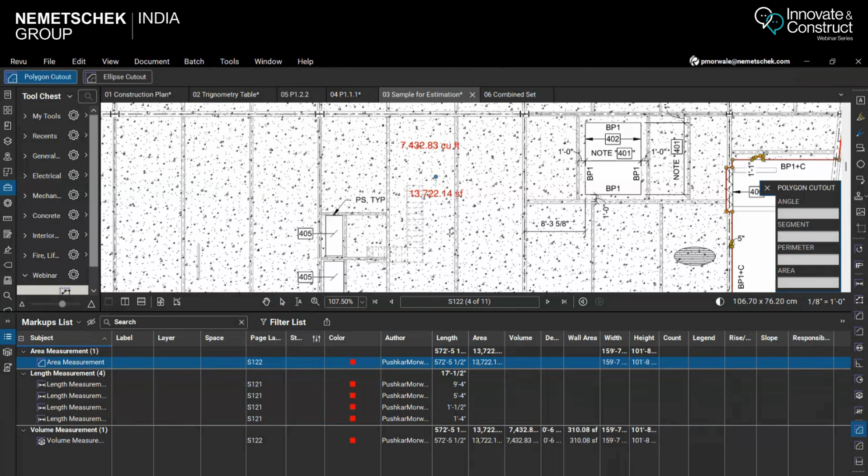You just go to tools, measure, and there is a polygon cutout. So you just keep looking at this area, and when I add the cutout, you can see it changes. So you can see over here, the square feet, it is changing.

Let me just delete the volume part. Let me put only the area, and I can show you again, measure, and you do the polygon cutout. See, it is changing.

So this way you can do the polygonal cutout, or if you have the ellipsoidal cutout, that is also possible. So you can mark something like this, and then with the help of these tangents and all, you can specify the exact ellipsoidal or circular area that you want as a cutout.

So does that answer, Mr. Bharat?

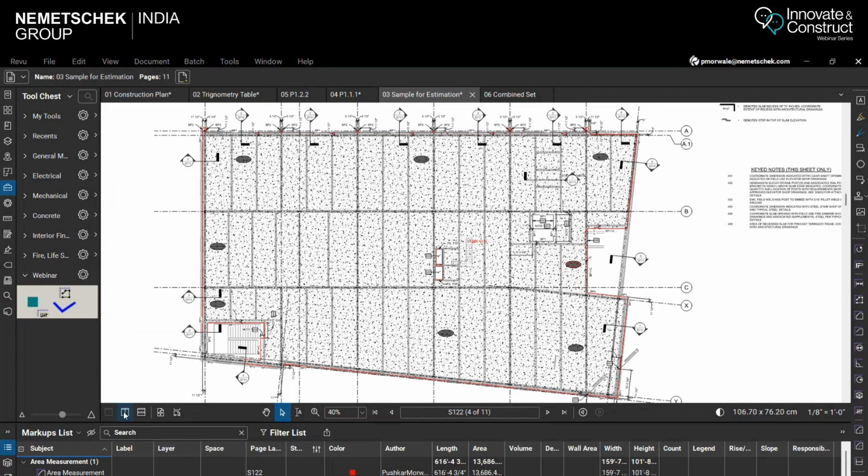I think Raja has got still more queries. Is it possible to link or reference another PDF from the main PDF for detail? So for this, maybe you can use split screen, and in this split screen you can have two different documents. It could be a drawing, and on the other window it could be specifications, data sheets, or anything like that. If it is a revision of the same drawing, you can synchronize the documents, and that option is available too. In case you want to refer to an altogether different document, you untick synchronize document. Then you can zoom or pan in one document, and the other window will have a different zoom or pan. This way you can refer to two different documents.

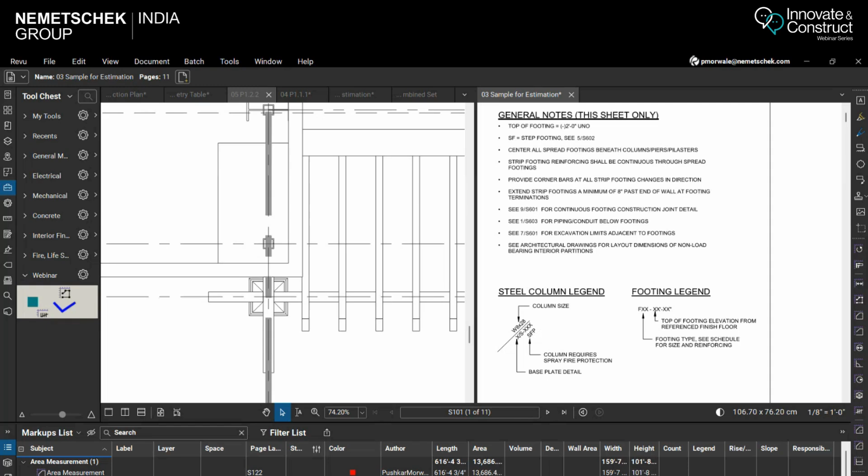In case I'm not able to get you through this particular webinar, we can always connect. I want to click on one of the rooms at random - does it show respective room details? So for this, there is something called edit hyperlink. This kind of option is there, and I can demonstrate this to you if you connect with me offline. I would suggest you have already got our email, and I can show you how to create these kinds of links, maybe within the same drawing, or to another drawing altogether. Such things are possible. There's also something called edit action, which you can use to create the required links. If you haven't tried it, we can connect offline and I can demonstrate. It's very simple - just read about edit action.